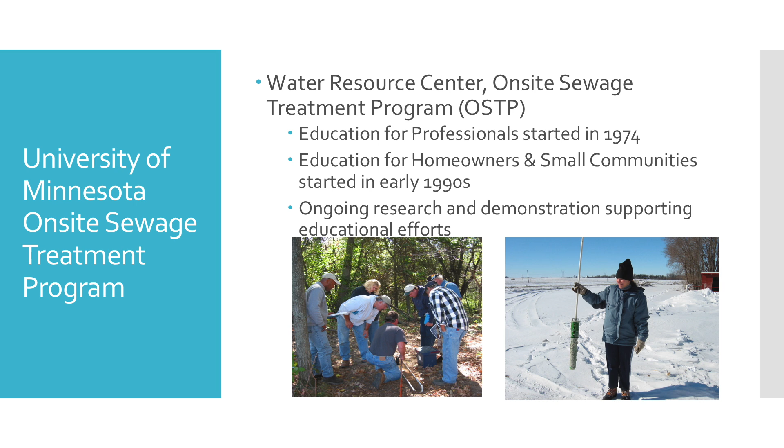I want to give a little background about why I am here, and it's actually because of a man named Roger Machmeier. Some of you may know his name, he wrote in Pumper magazine for years. He started our program at the University of Minnesota in 1974, longer than I've been alive. We've been doing education and research about septic systems, which is pretty remarkable. That led to doing homeowner education, and we also do research. Most of our research is very applied research, not theoretical lab work or brand new ideas, it's actually trying to solve problems in our industry.

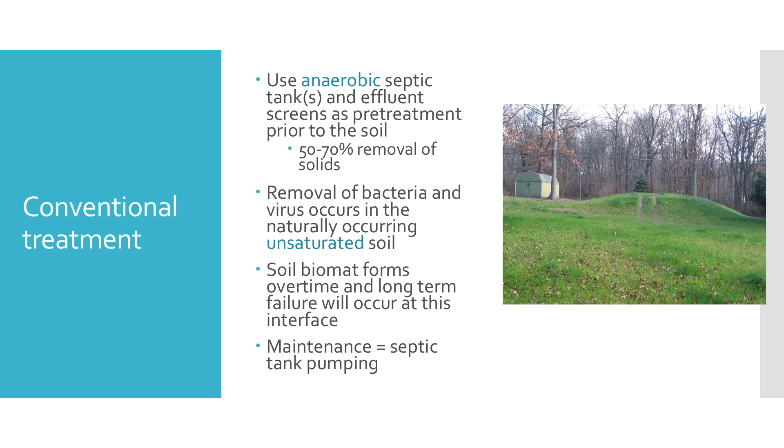In a conventional system, we use unsaturated soil to do that virus and bacterial removal. Probably the big downside of our conventional systems is that we're going to form over the long term, I'm talking 20, 30, 40 years, a clogging mat. That clogging mat in the beginning, the first 30 plus years, is actually our friend - it's microorganisms that are consuming the wastewater, breaking down the contaminants. But when systems do eventually fail, it's not just bacteria, it could be things like lint, right, it could be anything that's going to plug up the soil pores. Eventually that will need to be replaced.

Another big advantage of our conventional systems is that they're very low maintenance. When you have a gravity flow system, if you're lucky enough to have the site and soil conditions, we're looking at needing to really maintain our septic tank, which is a very passive treatment component.

These aerobic conditions are what most of our systems are designed to have, meaning that the pores in our soil are filled with air, which has oxygen. When that is the condition, the microorganisms are naturally going to be there.

It's important that as installers, for those of you serving that role, we protect that soil. During construction, the soils should not be smeared or compacted. We're always shooting to have soil that is not saturated when we put the system in, and as we start putting water out to the drain field, it's important that it stays unsaturated as well.

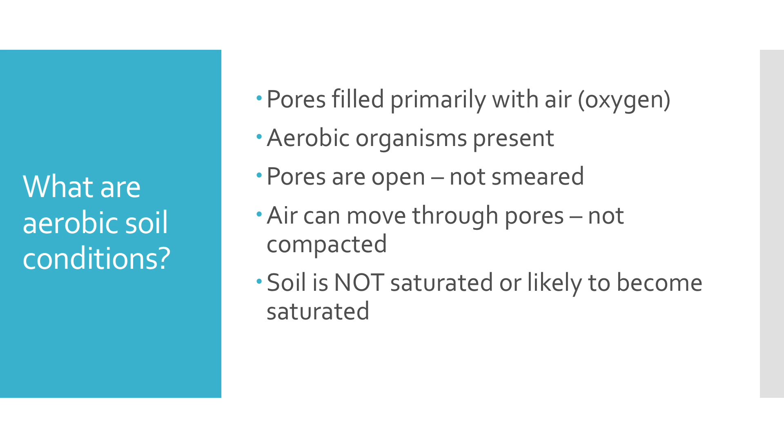These aerobic organisms that live in the soil, in ATUs and media filters, are pretty amazing. They take our dirty wastewater and remove a vast majority of the contaminants in a relatively small footprint. This process is 10 to 20 times faster than the anaerobic process in a septic tank.

These microorganisms are very effective at converting organic matter into various gases and into cell tissue—they're making more friends, they're reproducing. They also start the process of breaking other nutrients out of organic compounds.

These microbes do have some requirements. The first is that temperature must be life-sustaining. I expected it to be warmer here than Minnesota, and it wasn't. Generally speaking you probably have less of an issue, but once the ground gets frozen, the microorganisms really slow down—they don't like to be cold either.

The second thing the microorganisms need is a steady supply of food. They're like you and me—if you stop the system, if no wastewater is going out to whatever treatment system you have, the microorganisms are going to eat what's around, what's left over. They might eat each other. And after that, if the food source is gone, they're going to die. They need a steady supply of food to maintain a stable microbial population.

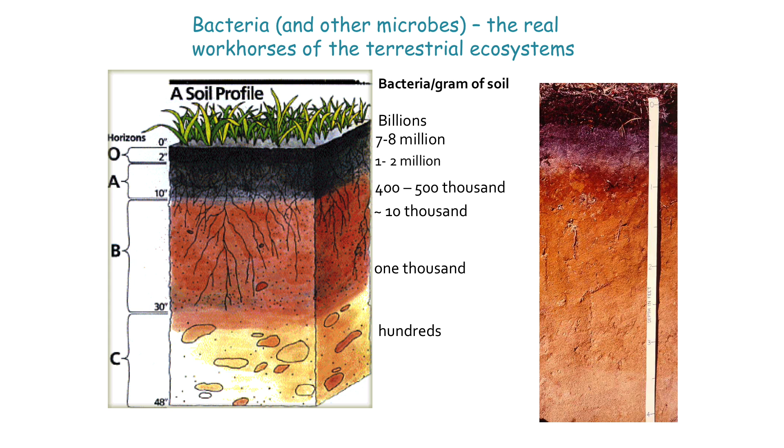Looking at a soil profile—this may or may not represent your exact soil profile on the next site, but it holds true that if you take a small handful of soil from the top of the profile, you will find in the range of 1 billion bacteria and fungi living in that soil. That's why I think it's hilarious when people say you need to seed your system, you need to put bacteria into it. There's bacteria everywhere—on your skin, on this table, and in the soil as natural soil microorganisms.

You may not have exactly this topsoil depth, this A horizon going to the B horizon, but you'll notice that as you get deeper in the soil, there are fewer microorganisms—going from 1 billion at the surface to 100, which is a huge decrease. So if we're going to put in conventional systems, the higher we put them in the soil profile, the more natural microorganisms will be there, for two reasons: one is the black topsoil, which is the food source, and the second is oxygen supply, which is what they want.

But what if you don't have all this good soil? What if you can't do a conventional system? There could be many reasons.

It could be that you have a high water table. We deal with that a lot, being the land of 10,000 lakes. Could be that you have poor natural soil conditions, so this could be a situation where you have very shallow bedrock. Could be that you have permeability problems. Usually we think about it on the low end, right? You have really heavy clay and you can't get the water in. But also if you have really gravelly sand, that's not going to be great for treatment either. The water will go away, but it may not be treated.

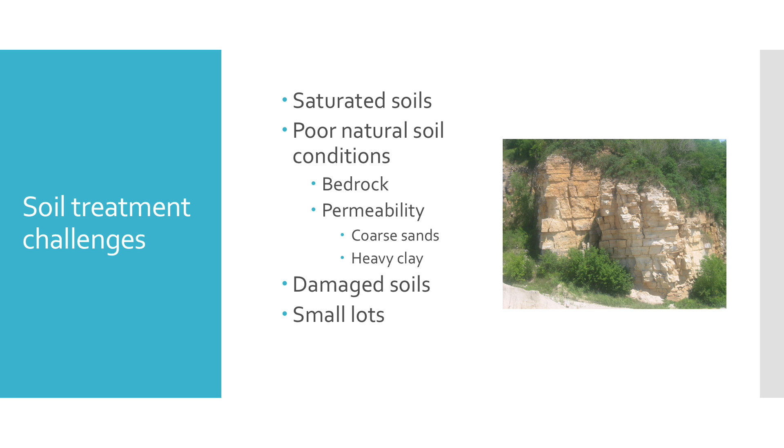There's also properties, and we see this a lot, existing properties, or sometimes some of those new lots we're developing. We developed all the easy lots, right? So now we're left with areas that have been filled, compacted, altered. Or it may be existing properties where they really weren't sustainably sized lots, and now you don't have a lot of soil to work with.

So then why might you use an advanced system? And I think this first one is often overlooked, but it's to extend the longevity of our existing soil treatment systems, whether that be one you're putting in today or one that's been in the ground for 20 years. When we have a soil treatment system, it is doing all the virus and bacteria removal, and still a fair removal of organic material. If we pre-treat the effluent before the soil, we could extend that soil treatment system much past 30 or 40 years.

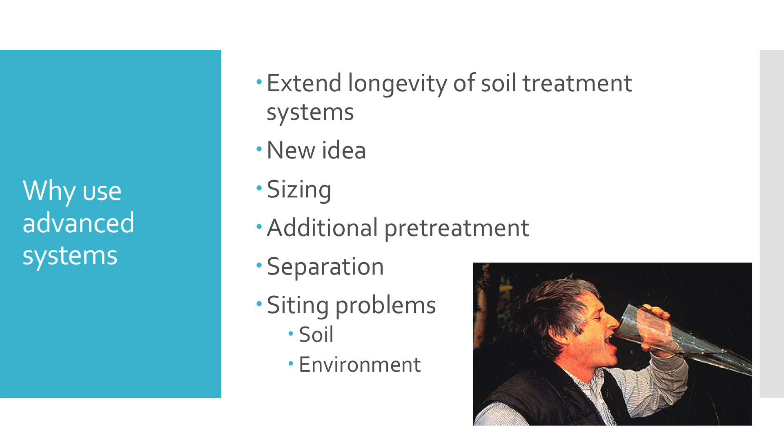There's also people who are always coming up with a new and better widget, right? A new way to treat wastewater. But more commonly, it may be because you have sizing constraints, you need additional pre-treatment before the soil, or you may have separation issues where you don't have the required separation to your limiting condition. And then there's all those siting problems where you have difficult soils, or you have a really pristine environment where you need additional treatment to make sure you're protecting the environment.

Nitrogen is probably the biggest contaminant that's getting a lot more attention across the US. Nitrogen in particular can be really devastating to ocean environments. I probably live as far away from one of those as you can. We're really concerned about phosphorus - that's what makes our waters green. But we're also seeing issues of nitrate contamination in groundwater. So, we're not the only source, but we are a potential contributor of nitrogen to the water tables.

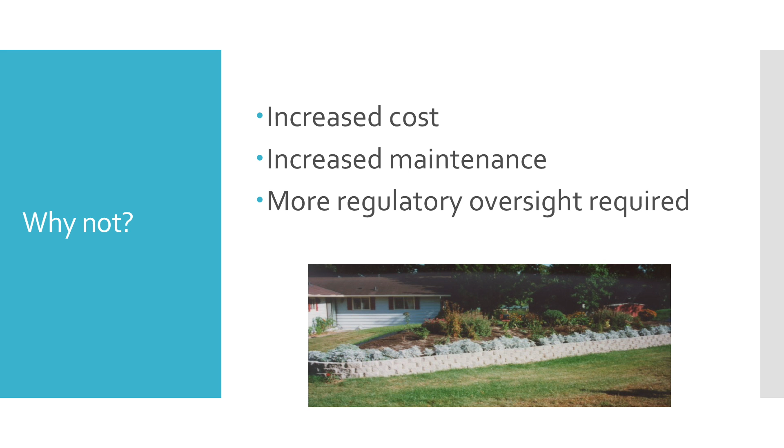So why not? Well, the increased cost would depend. We don't do surface discharging systems in Minnesota, but I understand you all do here. And when we're looking at doing pretreatment, we still have to have a soil component, so for many states it adds additional cost. But I think it's also fair to say that there is usually, and again it kind of depends on your soil treatment system, additional maintenance. And also, particularly if you're off-lot discharging, there needs to be more regulatory oversight to make sure that we're not just talking about pumping a tank every 3 to 5 years. We're now talking about maintaining systems every 6 months or annually, sometimes even pulling samples.

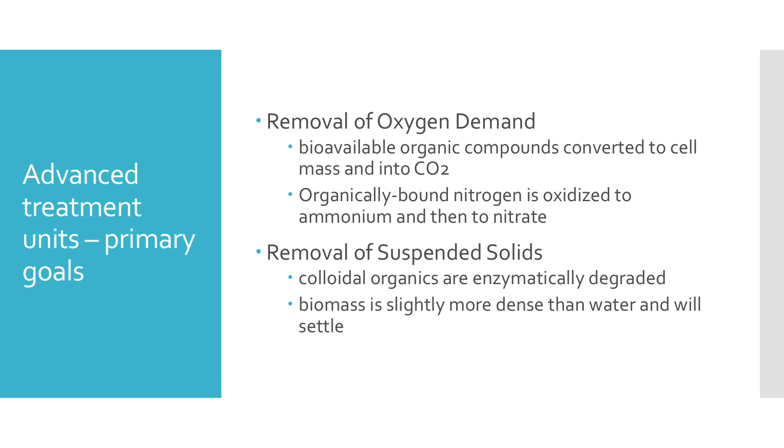So when we look at advanced treatment units, they have some common goals. The first and foremost is to remove the oxygen demand - not 100% of it, but usually 95% can be removed. This is the BOD measurement, right - how much oxygen is needed to break down the organic material. The second goal is removal of suspended solids, which is what makes water look cloudy or turbid. So coming out of an advanced treatment system, we're hoping to see effluent that's still not safe to drink, but actually at that point looks more like water. So now we could possibly do some disinfection, or we could put that to a smaller soil treatment system, particularly reducing vertical separation and square footage needs.

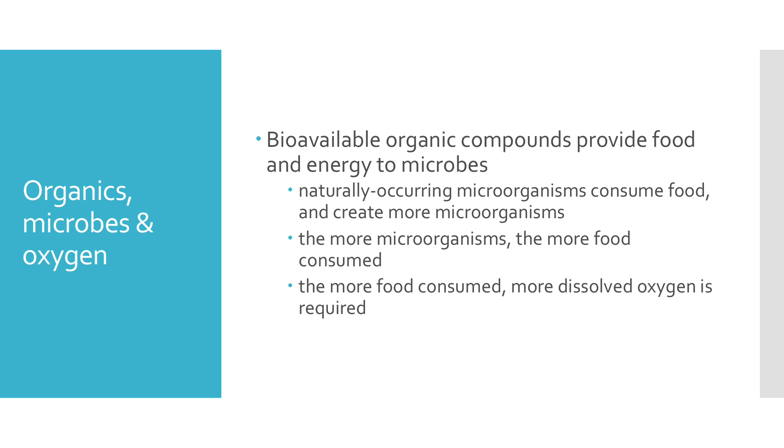So what happens during this process, regardless of the type of secondary treatment system, is those organic compounds are going to provide food and energy to microorganisms. The naturally occurring microorganisms are going to consume the food and create more microorganisms. The more microorganisms, the more food's consumed. The more food consumed, though, the more oxygen needed. So we're trying to keep these all at a balance of how much organic material, how much bacteria, how much oxygen. So the true benefits are reducing organic matter, pathogens, and sometimes nutrients, depending upon the design of the system. So the effluent that comes out of an advanced treatment system will have a reduced biomat in a soil absorption system.

You're still very likely going to form a thin film of microorganisms because there's still going to be some food and nutrients present in the water. The secondary treated quality effluent now is going to be able to easily go through a tertiary step.

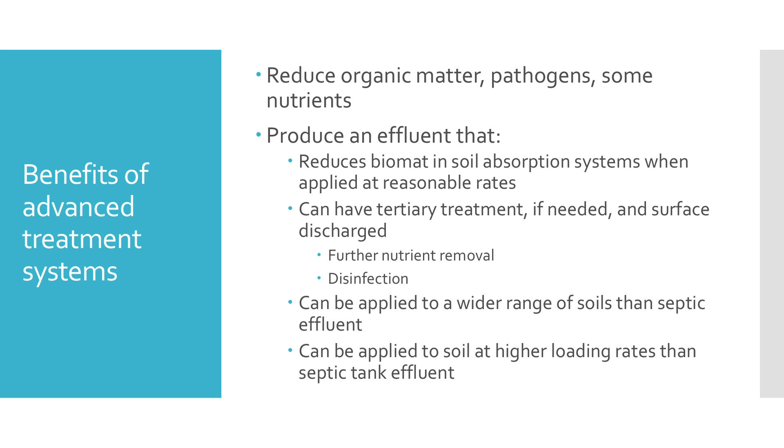So that could be disinfection or nitrogen removal. This effluent now, we're talking about it looking like water. So it can be applied to a wider range of soils because we're now not asking it to treat wastewater, we're actually asking the soil to disperse water back into the environment. And therefore you see it can be done at higher loading rates. So most codes in the US allow for a higher application of secondary treated effluent, and often in other soil conditions that otherwise you might have been limited to.

So the pretreatment systems I'm going to focus on today, the pretreatment prior to the soil, or in your case maybe to discharge. The two most common are forms of media filters and aerobic treatment units. These units may be coupled with disinfection depending upon where you're discharging to. They may also have recirculation. So recirculation is common when your goal is nitrogen removal.

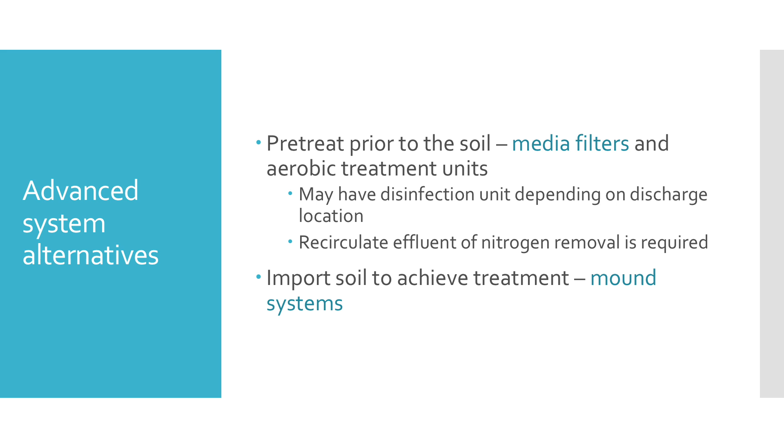The other alternative I'm going to talk about is importing soil. So if you don't naturally have the soil on site, you could bring it in by bringing in clean sand, which is commonly referred to as a mound system. I sometimes hear them being referred to as Wisconsin mounds, which is almost fighting words in Minnesota, right? It was interesting. Mound systems were really developed in the upper Midwest, Minnesota and Wisconsin around the same time. We do a lot of them. So we use a lot of passive soil treatment versus mechanical.

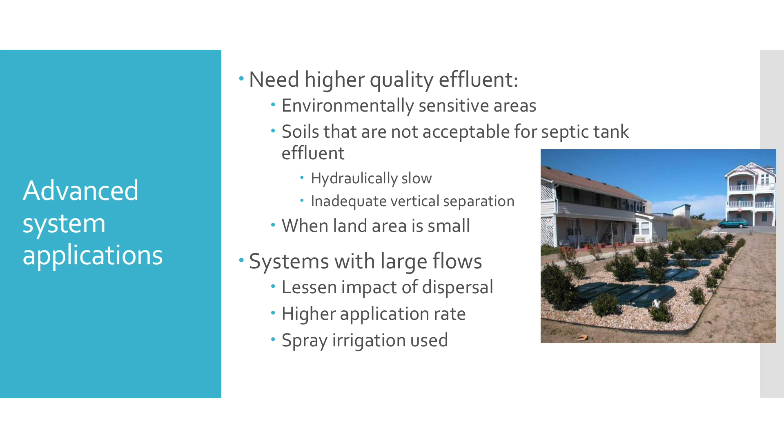So why would you need higher quality effluent? Well, again, it could be because of an environmentally sensitive area. It could be soils that won't accept septic tank effluent, or where your land area is small. Another application is when you're looking into more commercial or cluster systems. When you have a lot more flow, you may be able to mitigate some of that flow by having cleaner effluent. So this can lessen the impact of the dispersal system because you're allowed higher application rates, and again, where you may want to use spray irrigation.

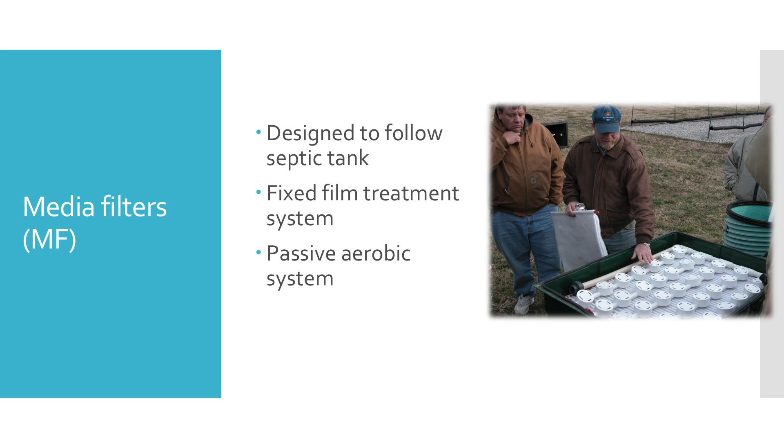So media filters are designed to follow septic tanks, and the key reason is we are using media which is similar to soil, so we want to remove a lot of those solids so they don't plug up the media filter. It is a fixed film treatment system, meaning the effluent as it travels over the media filter is going to come directly in contact with whatever that media is. So the big difference between this and an aerobic treatment unit is that it's passive aeration. We don't have a blower, a compressor. We're just taking the natural air around us and allowing that to dissolve into the treatment system.

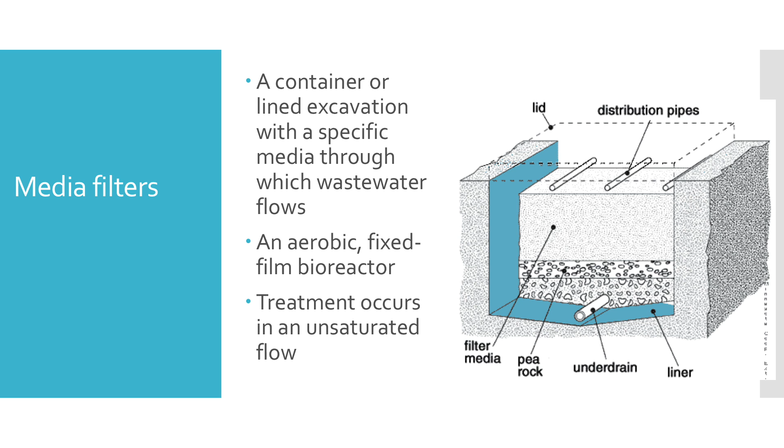So there are different ways media filters can look. The last picture I showed a container containing media. It was more common in the past that you would actually dig an excavation, and these sand filter type systems are still used. So again, a media filter is either a container or a lined excavation with a very specific media through which wastewater flows.

So again, an aerobic fixed film bioreactor, and the treatment occurs in an unsaturated flow, meaning we're going to apply a dose to the top of the filter and it is going to slowly trickle through that media filter.

So there are different types of media filters, and the real question is how many times is the effluent passing through the filter? With single pass filters, the effluent's going to go through only once, like you see here in the picture, it's collected in a bottom drain. That bottom drain can then either go out to a soil dispersal system, or it actually could, in some applications, be surface discharged. The second type of filter are ones that are designed to recirculate, meaning the effluent is going to go through that media filter many times, and it really depends on the technology how many times before it then goes out to a drain field or discharge.

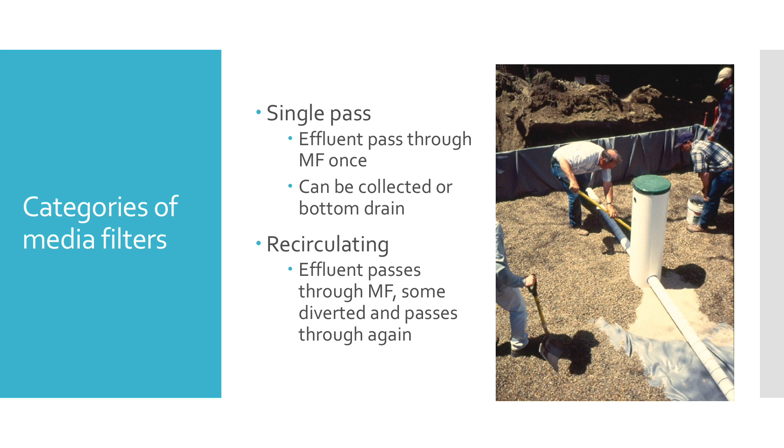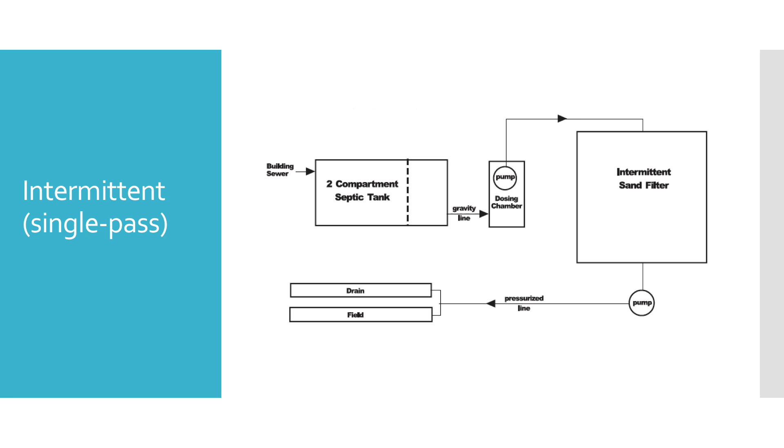So showing a layout, you can see here I have a 2-compartment septic tank. Very commonly there'll be an effluent screen on the way out to further limit the amount of solids. So in this case, you can see there's a dosing chamber that's dosing the top of an intermittent sand filter, then again going out to a pressurized drain field, which again is just going to optimize that final tertiary treatment in the soil.

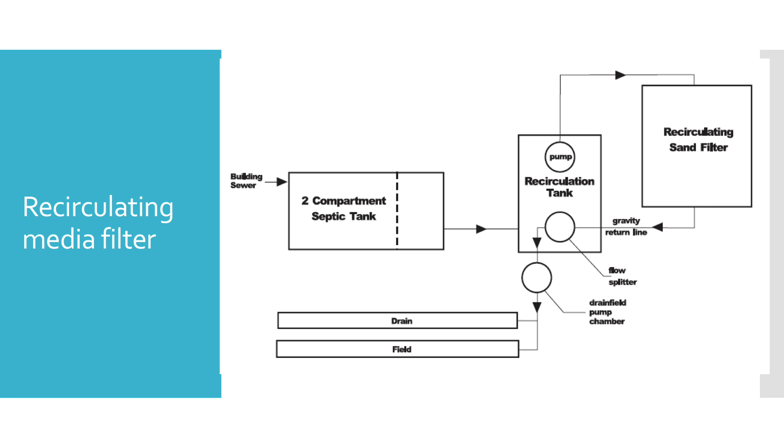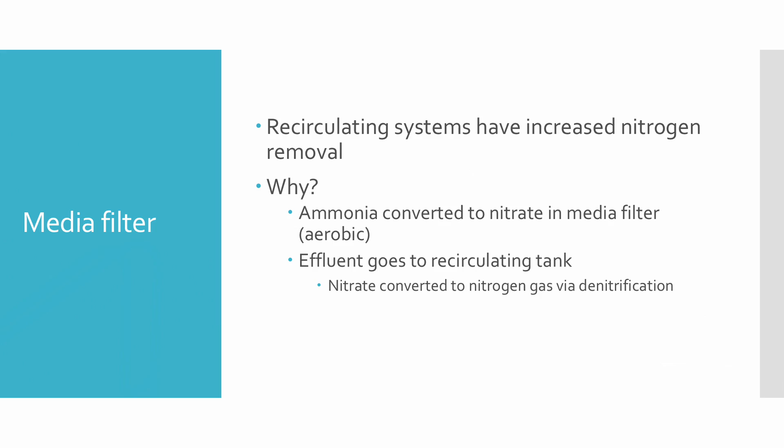So if instead you have a recirculating system, the primary goal of these systems is to remove nitrogen. We take the effluent that's gone through the recirc filter and take it back to a recirc tank, and in that tank you can actually see the nitrate nitrogen be denitrified if the right conditions exist. So why do recirculating systems have increased nitrogen removal? The key thing is as the ammonia travels through the media filter, it's rapidly converted to nitrate, and that process happens really well. That ammonia process always happens in our conventional systems, but the problem is nitrate continues to travel unless there's a denitrification process, which can happen in that recirculation tank.

Another benefit of a recirc over a single pass is that the top of that media filter receives a diluted effluent. What I mean is that in the recirc tank, it's a mix of effluent that's come from the septic tank and effluent that's already gone through the filter. So the amount of organic material present is decreased, meaning you can apply a higher loading rate. The real benefit is a smaller filter—now you're not talking about something that's 400 square feet, it could be a small box. The smaller filter surface area needed for the given flow can withstand somewhat higher waste strength. We see these commonly put on something like a convenience store where you have a lot of toilet flushing, rather than a restaurant with really high organics, elevated BOD and TSS levels.

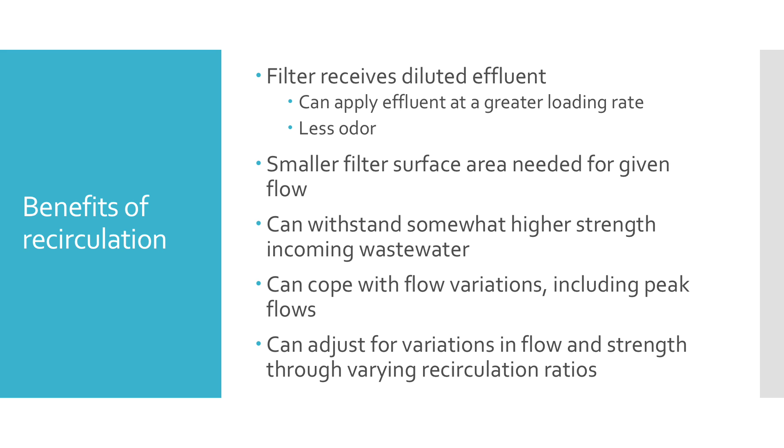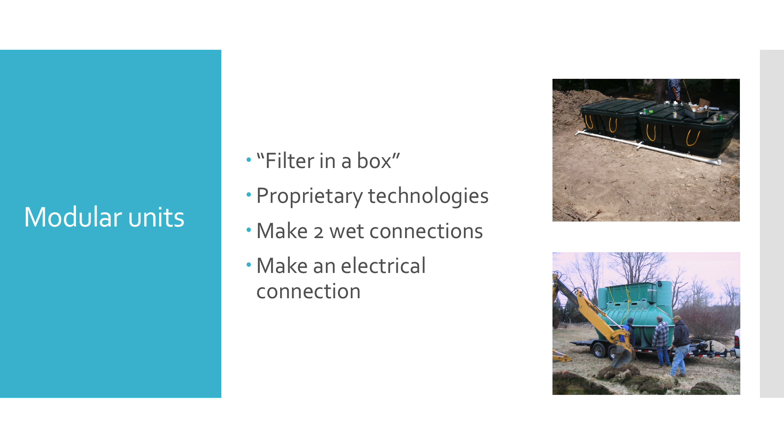Another benefit of these systems is they can cope with flow variations. Because of that recirculation nature, if you have high peaks or low events, it helps dissipate some of that loading. One benefit of moving away from sand filters, which were lined excavations, is modular units—these are filters that are proprietary by nature and come in a box. From an installation standpoint, they're much similar to aerobic units: you basically make two wet connections, hook up your electrical components, and you're good to go.

There are lots of different types of media. Historically, washed, graded sand and gravel were the most common, but we've definitely moved towards more manufactured media, and I think there are several reasons for that. One really is quality control—finding the right kind of sand or gravel in some parts of the country can be very difficult. So you'll see foam chips and cubes, peat, and—we've probably all seen coconut milk now at the grocery store—there's a huge excess of coconut husks. A company, instead of using peat, which has to be farmed and takes a long time, has developed a robust system that uses coconut husks as treatment media. There's also synthetic textile media, crushed glass, and there'll be something new—people are always coming out with often repurposed ideas, which is what the peat and husks are, but also new innovations around the type of media.

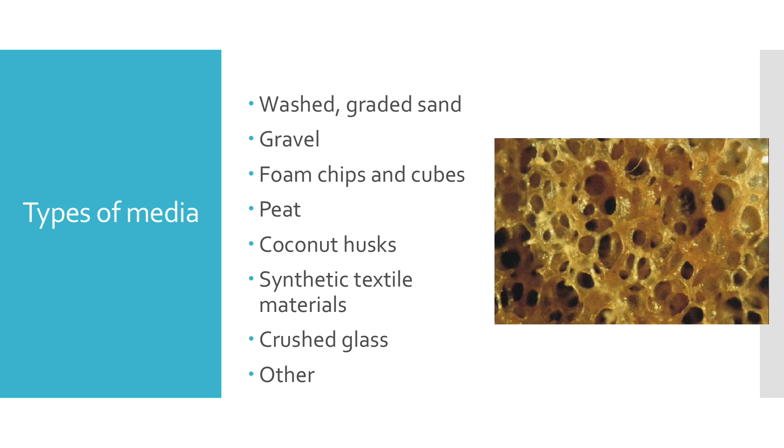This picture might show it well—this is a foam cube, very high surface area. If you think about a foam cube, when you apply water to it, it actually hangs on to it. You get really good retention time and very high surface area. A lot of this media is also designed to have lots of locations for the bacteria within the filter to hang out, and that's what bacteria likes.

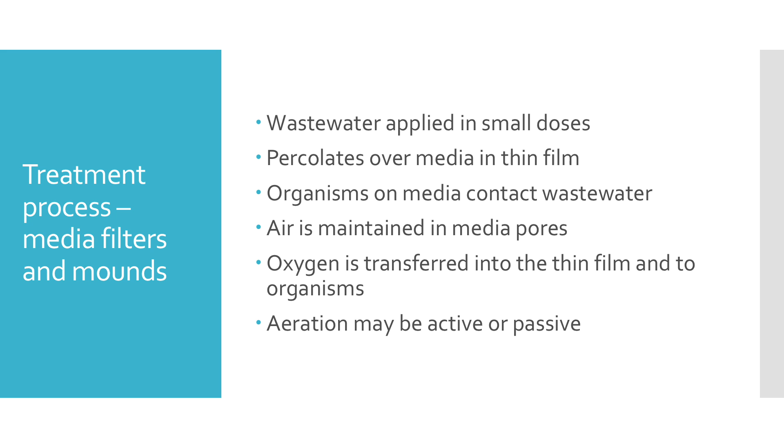In media filters and in mound systems, the wastewater is applied in small doses to the top of the filter—we have that thin film of wastewater traveling. The organisms are sitting on the media, just waiting for the wastewater, for the food, to come by. We don't apply too big a dose because we want to make sure there's still air present in those pores—oxygen is transferred from the pores into the thin film to the organisms. 99% of the time the aeration is passive. I've seen a few examples where they'll actually put drip tubing into a filter and pump air in, usually because they want a really small footprint and are looking to maximize oxygen transfer.

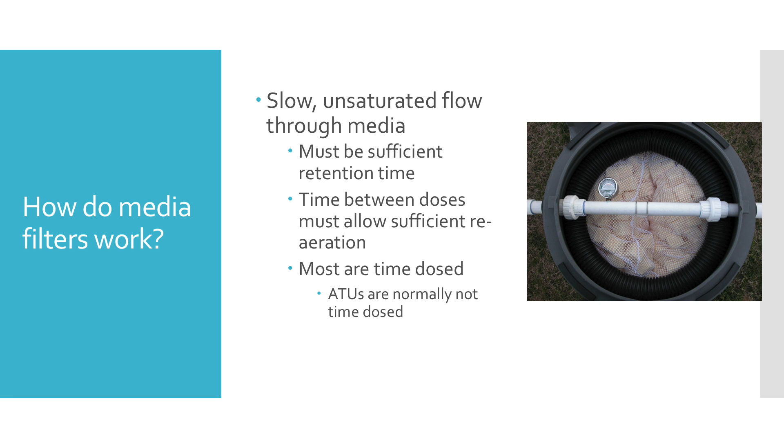So slow, unsaturated flow provides sufficient retention time, and that's one of the biggest advantages of septic systems over municipal systems—our effluent spends so much time getting treated. It's not a one-day process in and out; we're talking about days of treatment between our septic tank, our pretreatment systems, and then the soil.

Most media filters, though not all, are also time dosed, meaning the pump in the system that does that even dispersal is on a timer. That helps the microorganisms in the system perform better because they're fed on a more regular basis.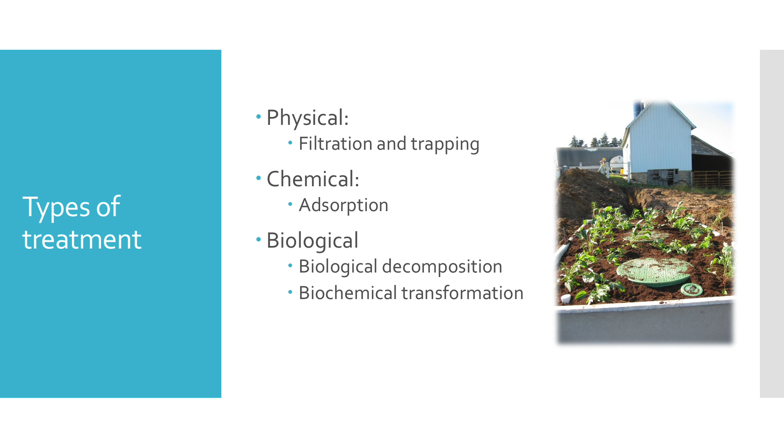The treatment occurring, and this is true of all soil-based components whether mounds, media filters, or conventional systems, starts from day one with a physical treatment process of filtering and trapping contaminants. There are also chemical processes going on where different contaminants adsorb onto the soil interface. We've commonly looked at phosphorus, which adsorbs onto the soil, but we're seeing more research about chemicals of emerging concern, like ibuprofen and antibiotics, also being retained in the soil. What's even better than just adsorbing is actually breaking down — that's the third process, a biological degradation or decomposition of the contaminants in our wastewater.

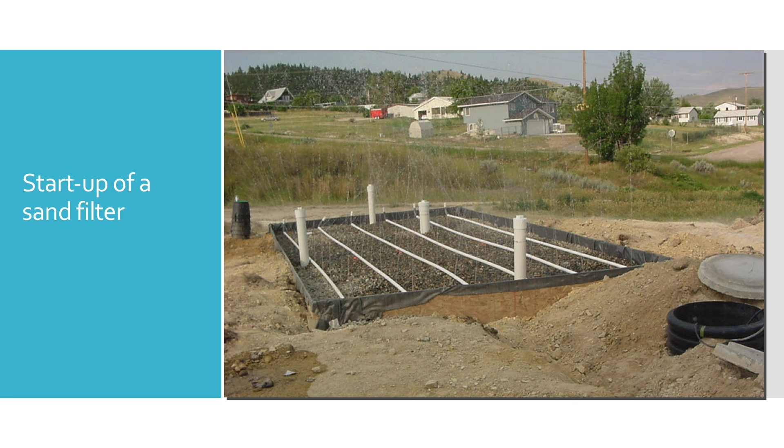So what about the effluent? What kind of quality can we expect? The column in the middle shows the general range we expect to see coming out of a septic tank. A septic tank and a media filter are both pre-treatment, treating it before either the soil or, if you're going with something as clean as a media filter, an ATU may discharge. You're looking at a BOD around 200 coming out of the septic tank, and when you look at a media filter, it'll be less than 25. That 25-30 for BOD and TSS is again below a discharge standard.

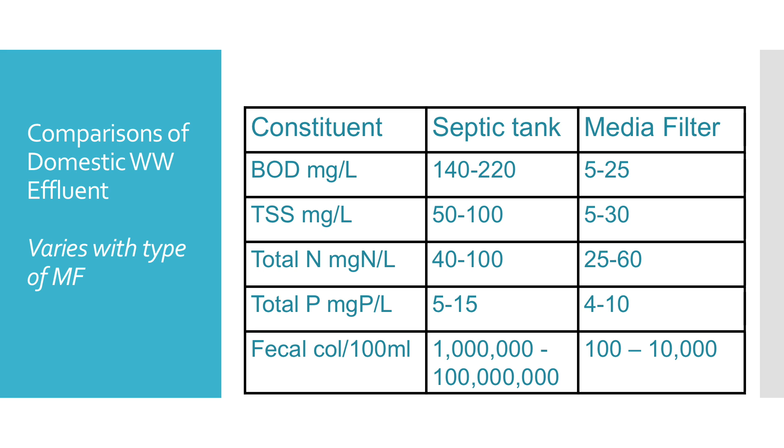Total nitrogen levels will depend on whether it's a single pass or a recirculating system. There's a little phosphorus removal, but not all the way down to zero — we'd like to see around 1 if we're actually going to be discharging. Then there are the fecal coliform numbers, which indicate bacteria and virus removal. Generally, media filters do a pretty decent job, showing anywhere from 100 to 10,000 microorganisms in the effluent.

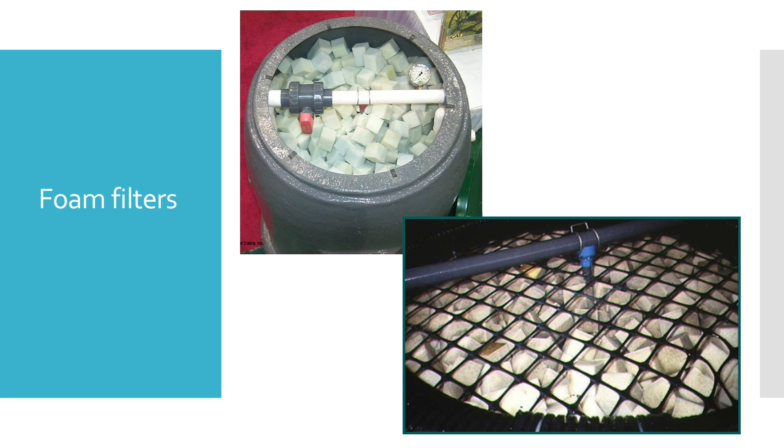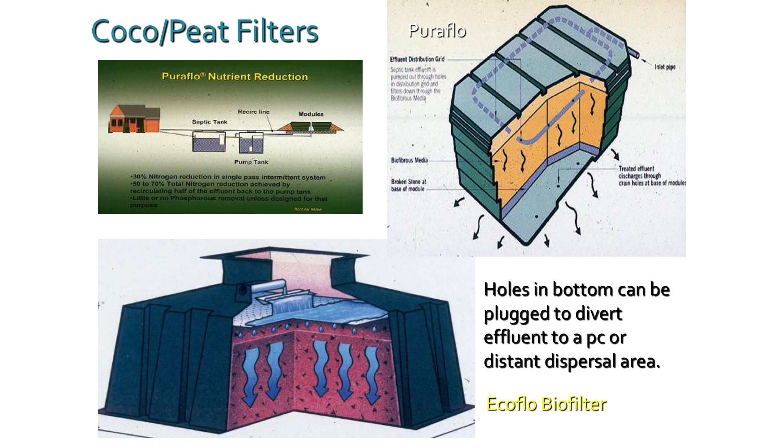Examples showing the coco and peat filters. There are two primary companies I see selling this — some use Irish peat, some use Canadian, though the Canadian company has actually moved toward using coco husk instead of peat. The thing to keep in mind with peat and coco is that over time they degrade since they're organic matter, so they need to be replaced. How often depends on use, just like asking how often you need to change the oil in your car — depends on how many miles. But generally you're looking at 8 to 15 years, so it's not a regular occurrence.

These systems can be designed to either collect the effluent or, in some applications, actually drain out the bottom, but you have to have the right soil conditions underneath them to do that.

As far as access, I think that's one of the other big advantages. I've shown you a lot of containers where you can see and access the media. With sand filters and recirc filters in the past, we'd have to dig them up to get at them, whereas now we have a lid we can open up. So they can be buried or free access — the free access filters often use gravel, foam, textile, or peat.

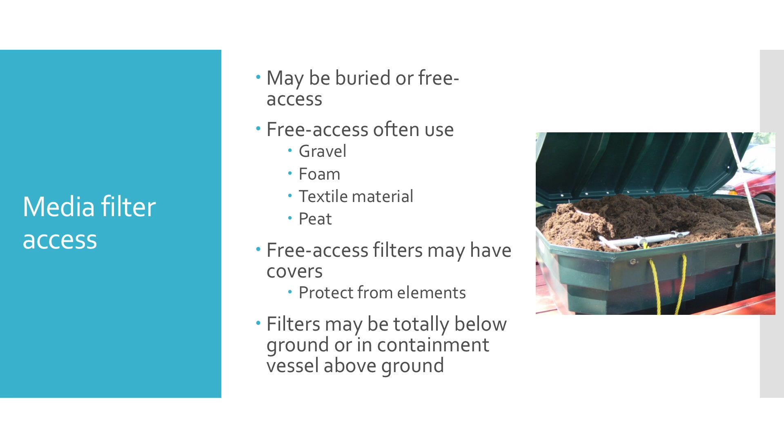The containers typically have covers, which protect them primarily for access and from the elements. They're generally below the ground, which helps insulate them when we get colder weather. The microorganisms in the systems, in general, prefer to be warmer — they'll consume more food when they're warm.

So kind of thinking about this as we wrap up the discussion about media filters, I just wanted to compare this. The treatment coming out of an ATU is similar to the effluent coming out of a media filter. The big difference is ATUs are saturated. They're a tank full of water, and we're trying to get that oxygen into solution. So we're going to have water and solids, and the actual air-water interface is minimal compared to media filters. It's a mechanical process, using a blower, compressor, or aspirator, one way or another, to get those bubbles into the effluent and hopefully into solution.

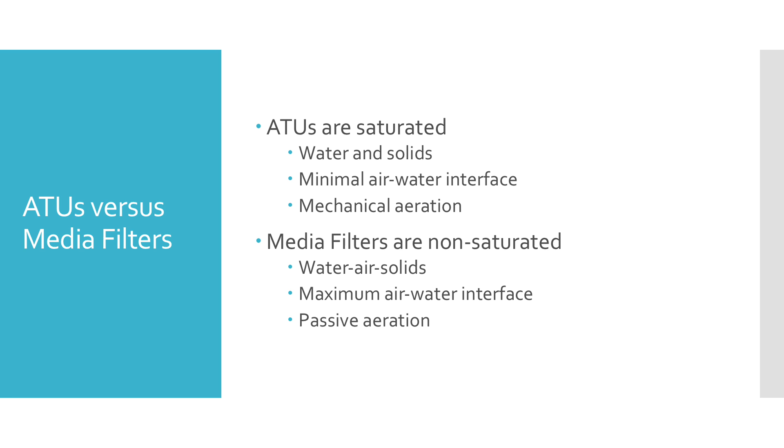Media filters, again, are not saturated, so we're going to have air, water, and solids. We're going to maximize that air-water interface as much as possible by using passive aeration. So with that, I wanted to discuss what passive aeration is.

This is what we use in our conventional systems, but also in media filters and mounds. This example wasn't done for septic systems—it was actually done for agriculture, looking at oxygen levels in the soil. They went out during a wet time of year with a lot of rainfall and compared it to a dry time. This was not saturated soil. They measured at 4 inches and went down almost to 48 inches, measuring the percent of oxygen.

The air around us is 21%, which is what we're all breathing. During dry time periods, 4 inches below the ground it was almost at 21%. Going all the way to 4 feet down, it went to 16%, which isn't a huge reduction, but it is less as you go deeper because it's passive—it's just working its way down.

But what was probably even more interesting is how the oxygen level changes during the wet time of year, when you get a couple inches of rain. Some of that water goes into your soil pores, and even though it's not saturated, there is less pore space available. So you can see it started at 14% four inches below the surface, and went as low as 8%.

So this is the natural oxygen we're using in media filters, in mounds, and in our conventional systems.

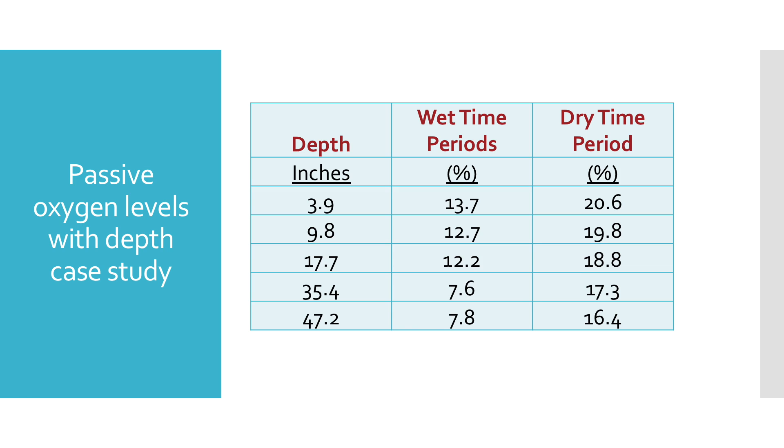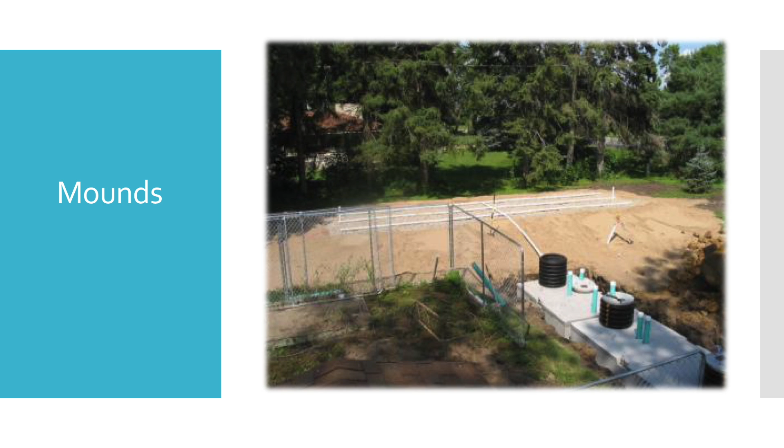With that, we are going to move into discussing mounds. All mounds are essentially an elevated pressure bed or elevated trenches used when you have a vertical separation requirement you can't meet with natural soil conditions, or when the natural soil would have trouble accepting septic tank effluent. So we're going to import sand to do it.

When we look at sizing mounds, we build the sand bed, but we have to keep in mind what the underlying soil is beneath the sand. I've been to states where they say their soils are so tough you can't make anything work. But we have soils in Minnesota that perc at over 120 minutes per inch, and we still put mounds on them. They're not small, which means they're not inexpensive, but we don't have the option of discharging.

And Sergio told me you guys do some spray irrigation here. If we sprayed in the middle of winter, we would have sewage ice skating rinks. It just doesn't work in our climate.

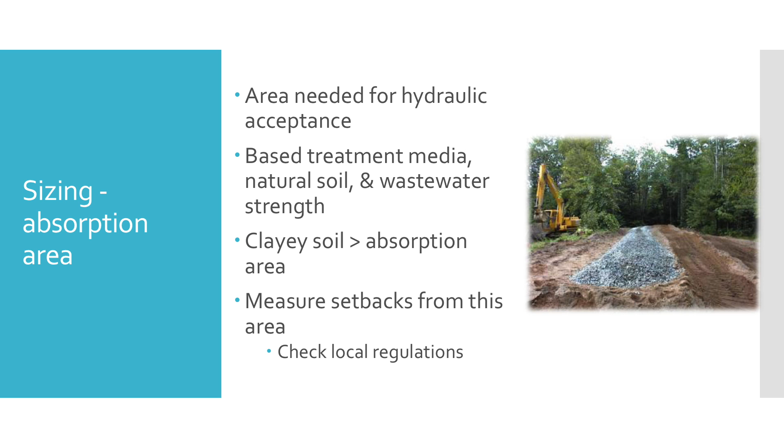So the actual size of the mound—sure, we're going to build the sand bed, but how big and wide it needs to be is based upon the underlying soil: the media, the natural soil, and the waste strength. A clay soil is going to have a bigger absorption width than if you had sand below it. You might wonder, why would you build a mound on a site that's already sand? Well, you may only have 18 inches to a water table, so we have to bring in additional soil to meet our separation.

So again, looking at what a mound might look like laid out on the property, across the middle is the media or rock bed, and the downslope area is actually the absorption width. The effluent travels through the sand, and the BOD and TSS are actually removed in the upper 6 inches. The reason we have separations beyond 6 inches isn't for removal of organics—it's for removal of bacteria and viruses.

So it's going to travel through the sand, but it's going to hit an underlying clay loam. The clay loam isn't going to take the rate the same as the sand. Things are going to move slower, so we actually have to size it based on that downslope required width.

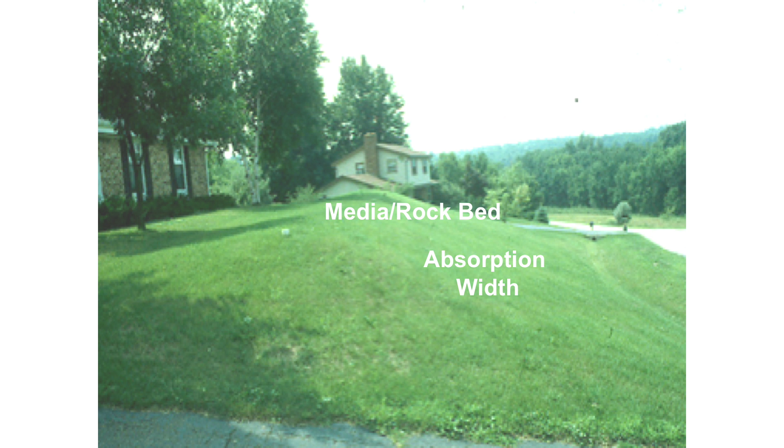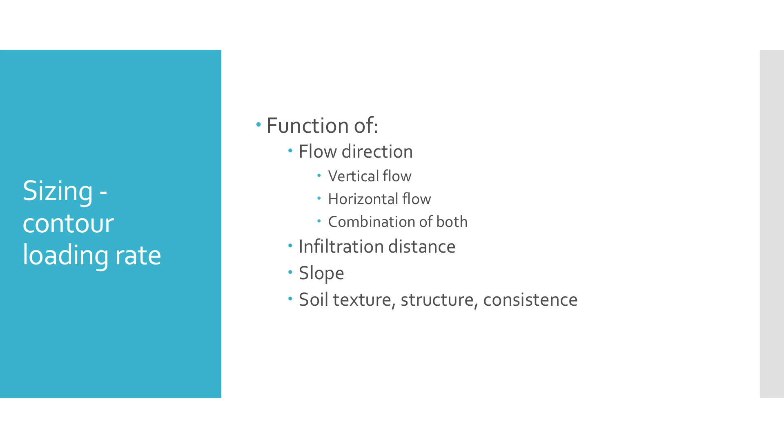So how we decide how big and long the system is also based on a term called the contour loading rate - how much water we expect to move down versus sideways. We all know this, even though I've had homeowners think it all evaporates. All the wastewater from their septic system - even in the driest part of your state, I don't think that's reasonable. I think we have to expect that some of that effluent is going to move down, and it might not move all straight down, so some of it's going to need to move laterally. We pick a contour loading rate based on those soil principles.

So a mound is typically going to have 1 to 2 feet of clean sand, and the word clean is very important. When we first started building mounds in the 80s, we often used what people referred to as pit run. It was dirty sand, had lots of silt and clay mixed in, and those mounds didn't last. So we need a very specific sand.

We're going to have a septic tank, a pump tank, and pressure distribution, so we evenly apply the effluent across the soil. I know homeowners think pumps are a 4-letter word, but a pump in a system is the best way to achieve good treatment, because when we look at our loading rates and all the research done in the 70s, it was all done based on an even application of effluent to the soil.

Most people have wells, and they have a well pump, and they last a long time - so do septic pumps. Then we're going to have a distribution media, and I'll show some examples. We used to historically use a lot of rock, but many installers have moved towards using other distribution media besides rock.

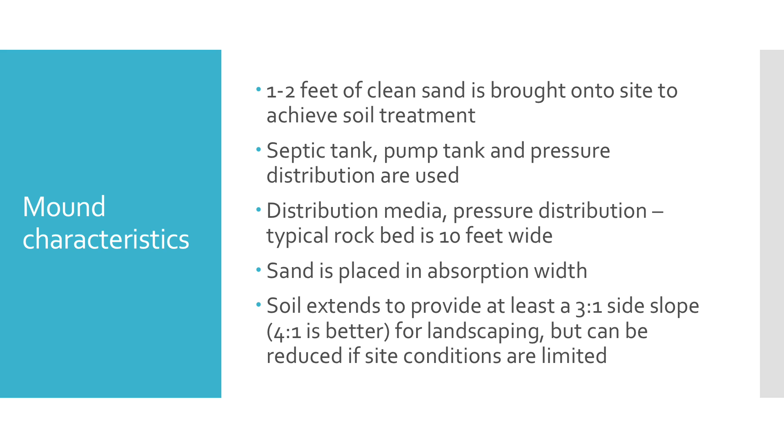We typically build that bed, whatever it's filled with - rock, chambers, EZflow, you name it - 10 feet wide, but if I go across the state line into Wisconsin, they build a lot of 5 and 7 foot wide beds. We place sand in the absorption width, and then we actually extend soil to either a 3 to 1 or a 4 to 1, you can go 5 to 1. It'll blend in better, it'll look less like a hump in the yard. But as you start bringing in more material, the cost of the system goes up.

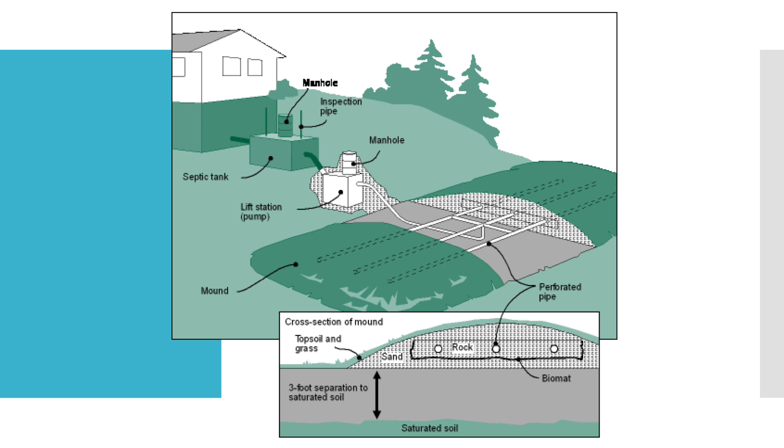So looking at it laid out on a property, we see in this case they're lucky enough to go gravity to their septic tank, gravity to their lift station. The lift station then doses the mound system. Looking at it from a side view, this one shows it as one bed across the top. It could actually be installed as two trenches sitting across the top of that sand.

You do have to have some unsaturated soil. So sitting underneath that sand bed, we design to have at least a foot of soil. We have sites where we have bedrock where we might not have a foot, and then we just bring in more sand.

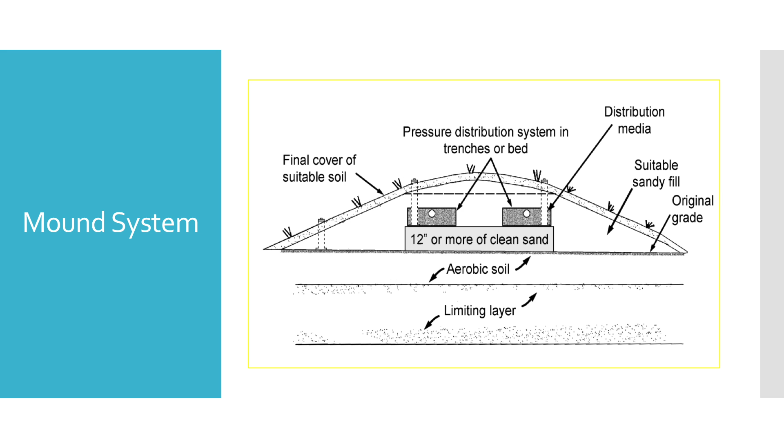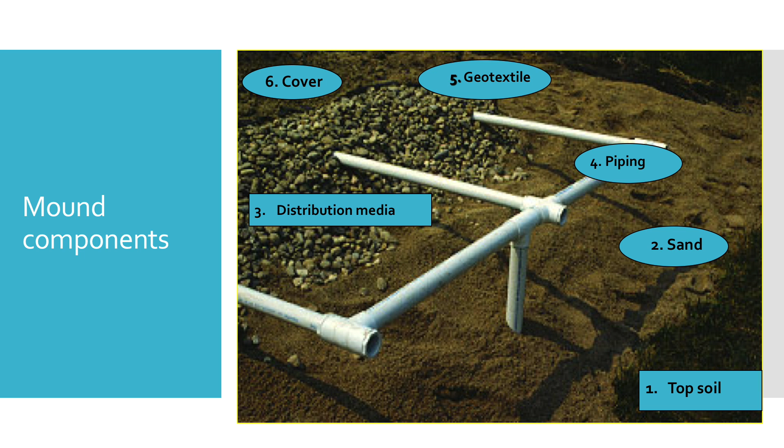So how it looks - our topsoil, which we actually leave in place on some of your more limited sites since it's the only good soil you have - we scarify that surface, we put down the required amount of sand, we bring in our distribution system with our pressure pipe, geotextile if you're using rock or Ez-flow, and then cover, which you're going to get something to grow across the top of there to particularly prevent erosion and certainly frost from going into the system.

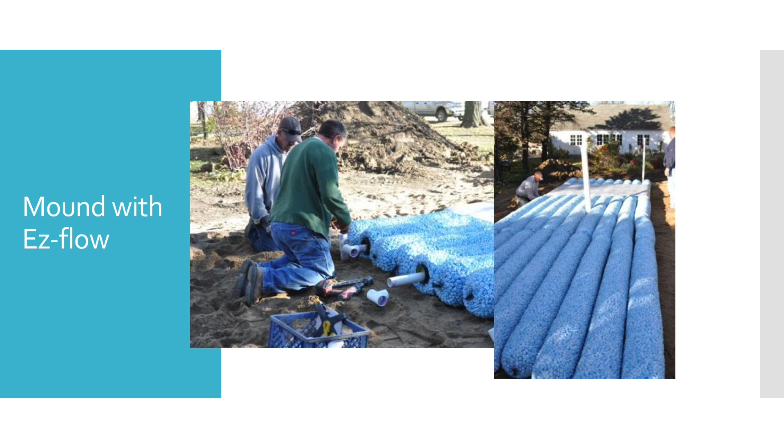So here again shows a mound being built with the Ez-flow product. And when I first saw this, I thought it looks like packing peanuts. Well, do you know what happens if you put a packing peanut in your mouth?

It dissolves, which is a fun party trick, right? But this is different. It doesn't dissolve when it gets wet, and it's also very strong. You can drive across the top of that.

This shows where they're putting a pipe basically in every third lateral to disperse across the top. This can be done with chamber systems as well. We used to just build them with rock, but clean rock is hard to get in some parts of the country, so we use other media. The purpose of distribution media is to spread the wastewater out.

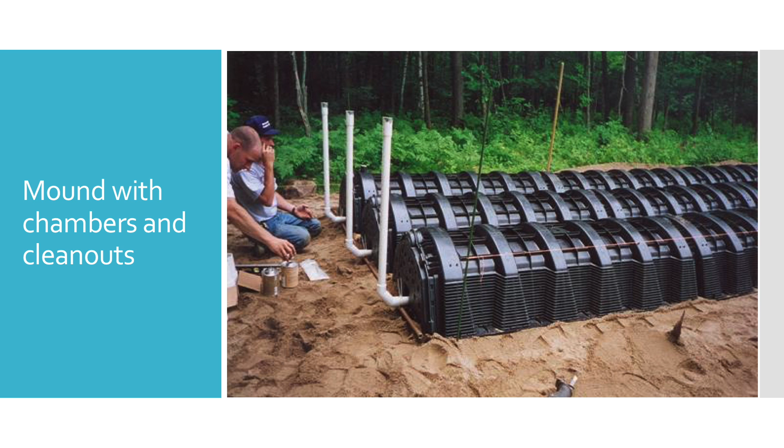The magic happens in the soil, so management and maintenance is essential. With media filters and mounds, annual maintenance is typically required, and it needs to be done by someone who knows what they're doing.

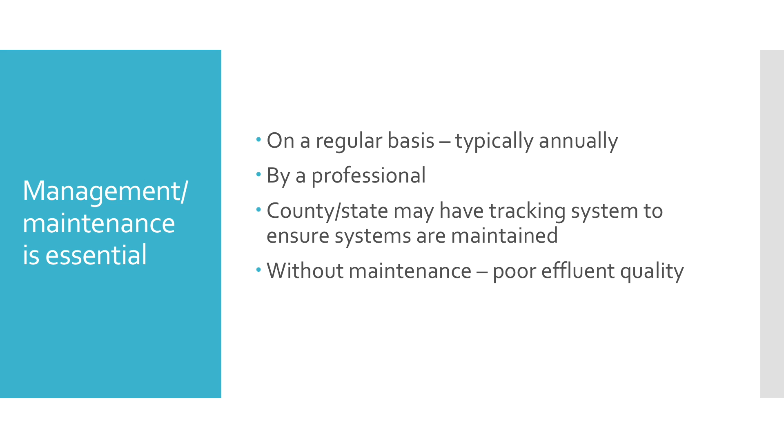Some counties and states will have a tracking system to ensure systems are being maintained, and we're certainly moving in this direction, with more regulatory authorities tracking. Compared to wastewater treatment plants, they have operators and reporting. We've seen particularly in our more populated counties that's the direction we're moving—when people get their tank pumped or have their ATU serviced, they're actually required to report that information.

We're protecting public health and the environment, which is why we all have jobs. Septic systems take dirty water full of contaminants that make people sick and can harm the environment. There are pros and cons because it takes a lot of work to track and know what's going on, but if we don't have that, do we actually know that public health is being protected?

So what's typically involved with maintenance? With pressure distribution, those laterals over time will have water, sewage, and nutrients, so we'll grow some slime and collect some solids. Flushing those laterals might be every 3 to 10 years—not something that typically needs to be done annually, unless you're looking at more commercial strength waste.

With some media filters, you may need to rake the media, particularly peat and coconut husk ones, because you can get uneven settling as things degrade. You may need to replace or clean media over time, and most critically, make sure your tanks don't have too much sludge, and clean effluent screens if those are part of the system.

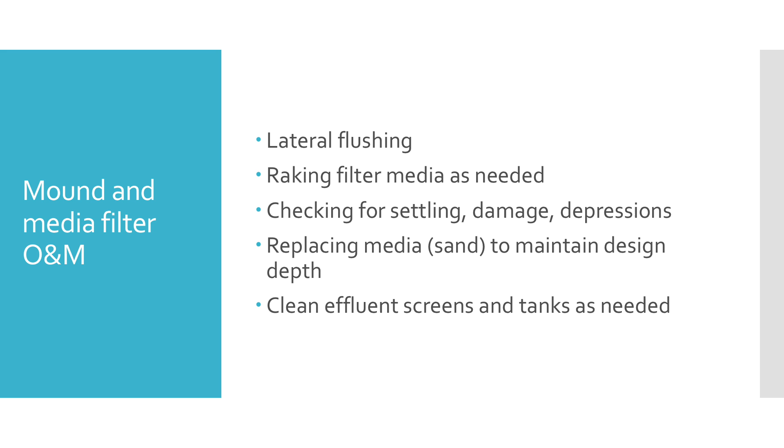Aerobic treatment can help solve problems—I firmly believe that. There are lots of different ways to get at aerobic treatment. It could be a solution if you don't have enough separation or if the soil is coarse. The effluent from these systems and ATUs will have fewer pathogens, because bacteria and viruses don't like oxygen-rich environments—they're used to living in our guts, which are not full of oxygen.

If your site is too small, the real advantage is we take out most of the BOD and TSS, so now we can have a smaller footprint. If your waste strength is high—when you get into commercial flows rather than residential homes—pre-aeration before the soil is almost required.

The loading rates in our codes assume domestic strength wastewater. Say it's a convenience store, not doing much cooking, lots of toilet flushing, a little food debris, maybe a soda fountain—those are awful, the BOD coming out of a soda fountain will impact your wastewater stream even in small amounts. If the BOD is coming out at 500 and you put that to a conventional system not designed for it, or even a media filter or ATU not designed for it, there's not going to be enough oxygen to deal with that high amount of organic material.